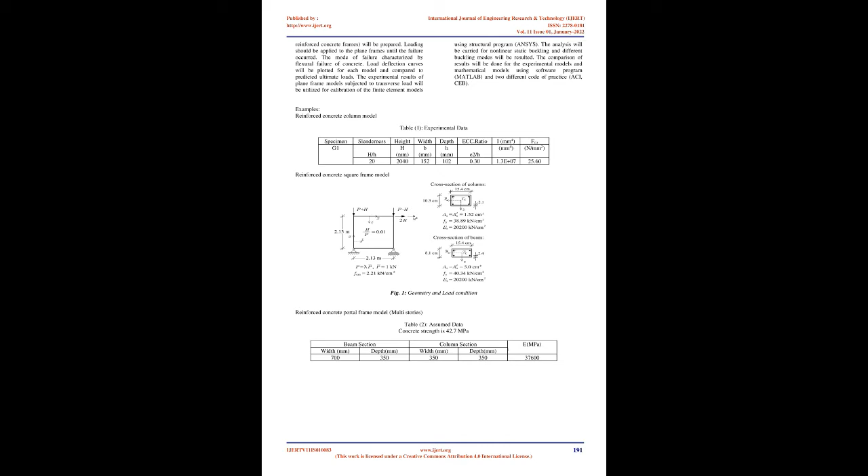The results obtained from the analysis above were compared with experimental published results, the American Standard, ACI 318, and the European Standard, CEB, and showed reasonable and acceptable agreement with the computer program and ANSYS software results. Keywords: nonlinear buckling analysis, eigenvalue buckling analysis, reinforced concrete frames, finite element.

1. Introduction. Calculating the stability of structures has always been an important engineering discipline. Especially the calculation of the critical buckling load of a structure has been a subject for study since Leonhard Euler in 1744 calculated the critical buckling load for a simply supported column. Buckling is a phenomenon where a structure suddenly changes from one equilibrium configuration to another equilibrium configuration.

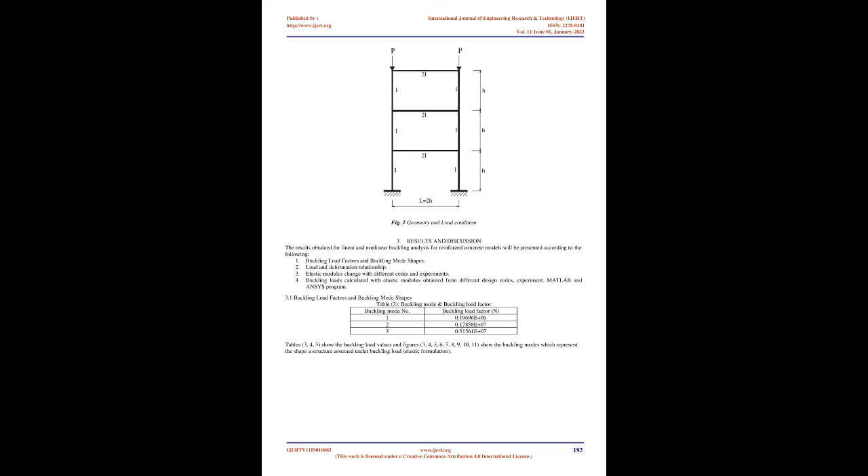The calculation of buckling loads of a structure is of great importance, due to the possibility of sudden failure of the structure if the critical buckling load is reached. Some structures might lose all stability when the buckling load is reached, which could put people at risk if a roof or other similar structure loses all stability. Many researchers have studied finite element method and nonlinear analysis of structures. Some of these studies will be cited here.

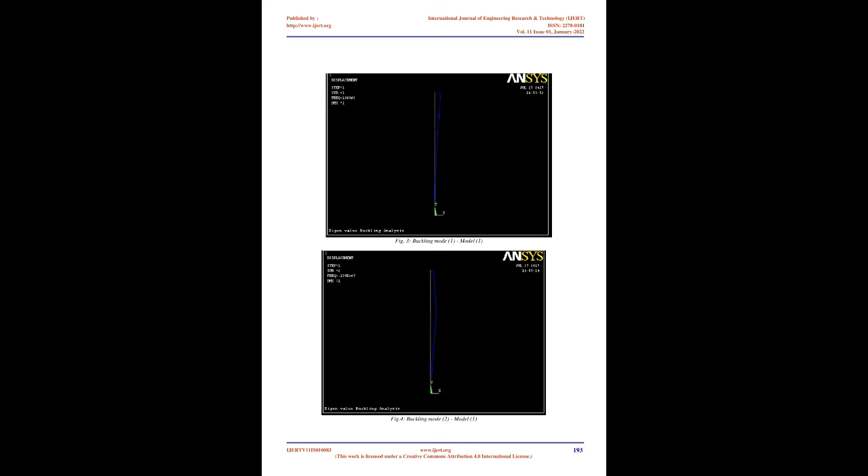Wood and Zienkiewicz, 1977, presented a continuum approach for the geometrically nonlinear analysis of oriented bodies, e.g. beams, frames, and arches, in total Lagrangian coordinate system using finite element method. The nonlinear equilibrium equations are solved using the Newton-Raphson method, for which a number of examples were solved. The derivations were extended to include axisymmetric structures.

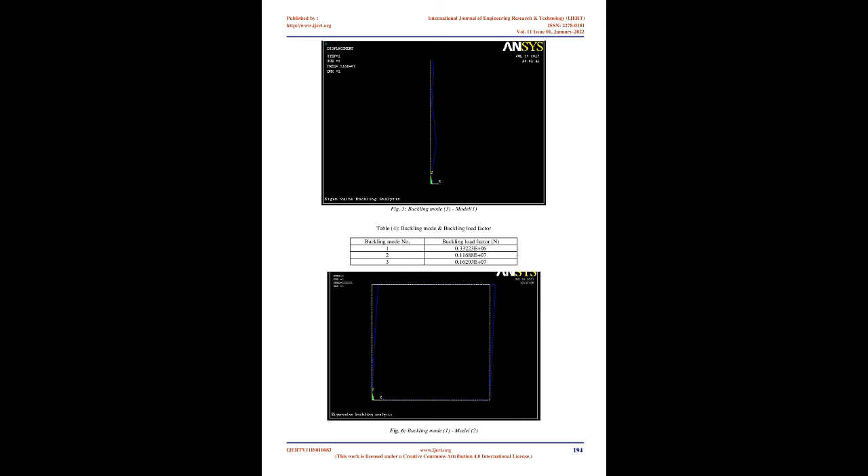Kam, 1988, presented a general method for the large deflection analysis of inelastic plane frames. Chan, 1988, presented a geometric and material nonlinear analysis procedure for framed structures, using a solution algorithm of minimized residual displacements. Kassimali and Abbasnia, 1991, suggested a method for large deformation and stability analysis of elastic space frames.

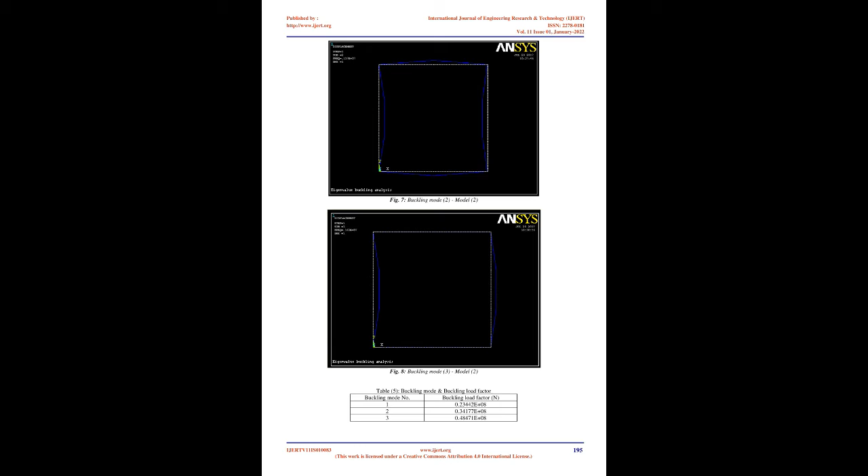K.W. Wong and R.F. Warner, 1997, presented an efficient approach for the nonlinear analysis of reinforced concrete frames using line elements. Zdenek P. Bazant and Yuyan Xiang, 1997, proposed an improved method of analysis of reinforced concrete columns in braced, no-sway frames, which was suitable as a simple computer solution for design practice and was more realistic than the existing ACI and CEB methods.

Endre Dulácska, 2007, discussed the approximate determination of the elastic plastic load parameter of structures, and he also established a lower and an upper bound for the critical failure load parameter, with the aid of which the results of computer calculations can be checked.

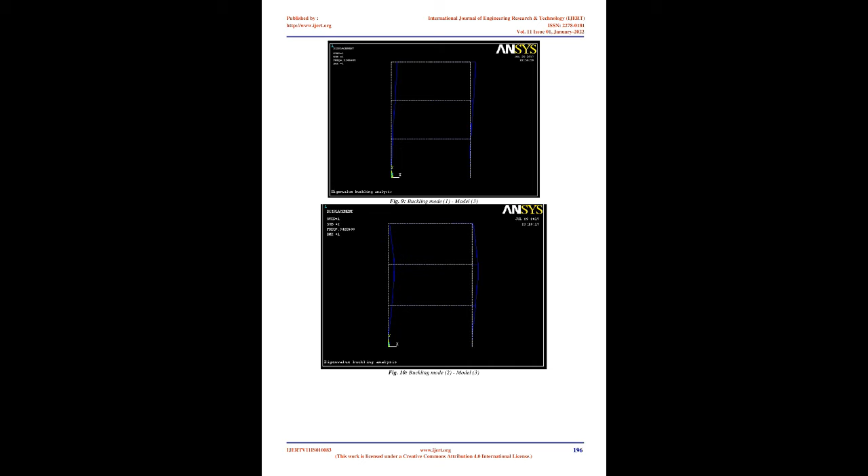Rafat Sezer, 2010, studied the geometrical nonlinear analysis of prismatic plane frames with the stiffness matrix method by using stability functions. K. Tzaros and E. S. Mistakidis, 2011, presented a method for calculating the buckling loads and the buckling shapes of continuous beams with unilateral intermediate constraints based on the theory of elastic stability using the Euler equilibrium method. The purpose of the study was to find the critical load or buckling load of the reinforced concrete frames.

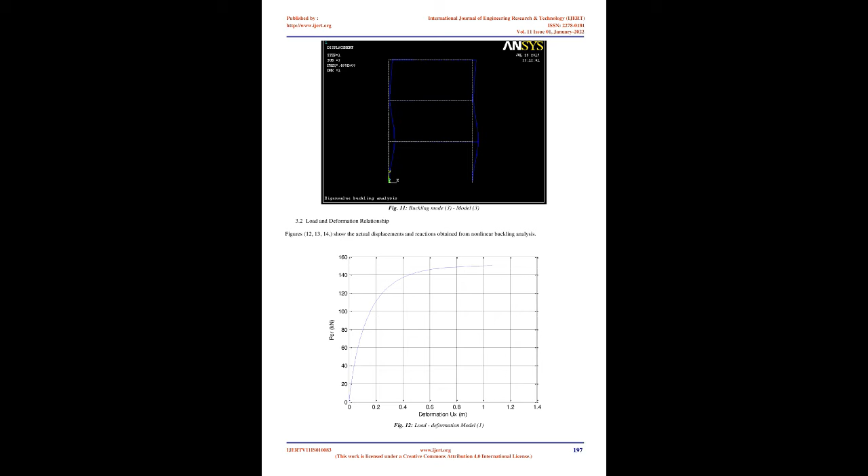2. Methodology. To predict buckling loads and load deformation curves of reinforced concrete frames, the methodology will be prepared through the following steps. Different finite element approaches have been proposed for the analysis of different types of structures. The theoretical study depends on nonlinear static buckling of plane frames. The Newton-Raphson approach will be utilized to trace the equilibrium path during the load deformation response.

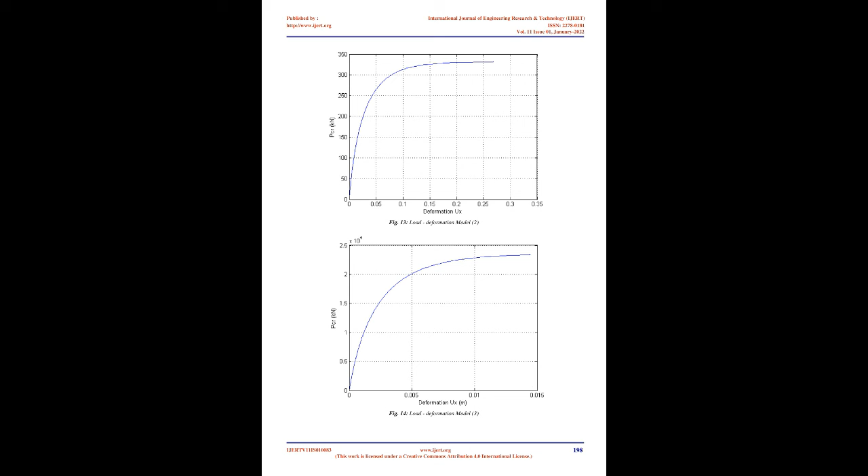About 3 models, 1 single reinforced concrete column and 2 reinforced concrete frames, will be prepared. Loading should be applied to the plane frames until failure occurs. The mode of failure is characterized by flexural failure of concrete. Load deflection curves will be plotted for each model and compared to predicted ultimate loads.

The experimental results of plane frame models subjected to transverse load will be utilized for calibration of the finite element models using the structural program ANSYS. The analysis will be carried out for nonlinear static buckling and different buckling modes will result. The comparison of results will be done for the experimental models and mathematical models using the software program MATLAB and 2 different codes of practice, ACI and CEB.

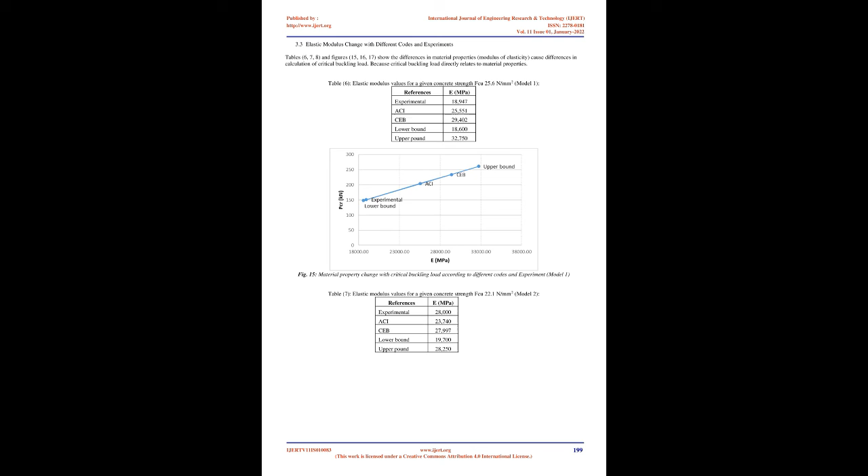3. Results and discussion. The results obtained for linear and nonlinear buckling analysis for reinforced concrete models will be presented according to the following. 1. Buckling load factors and buckling mode shapes. 2. Load and deformation relationship. 3. Elastic modulus change with different codes and experiments. 4. Buckling loads calculated with elastic modulus obtained from different design codes, experiment, MATLAB, and ANSYS program.

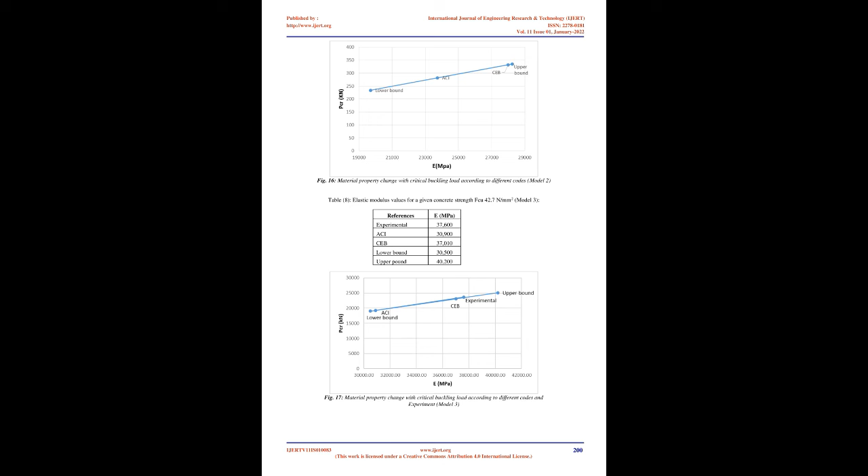3.2 Load and deformation relationship. 3.3 Elastic modulus change with different codes and experiments. 3.4 Buckling loads calculated with elastic modulus obtained from different design codes, experiment, MATLAB, and ANSYS program. 3.1 Buckling load factors and buckling mode shapes. Table 3, buckling mode and buckling load factor. Buckling mode No. Buckling load factor, N.

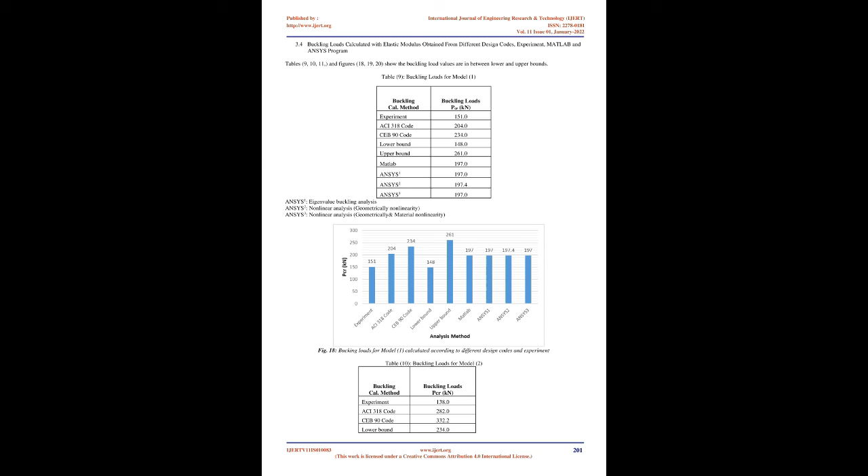4. Conclusion. The discussion of the results of the analysis obtained in this study resulted in the following conclusions. 1. The eigenvalue buckling loads and the buckling modes for various reinforced concrete frames were presented using the ANSYS computer program. 2. A nonlinear buckling analysis program using MATLAB was used to compute the buckling load, utilizing the stability functions to determine the buckling load. Comparison with ANSYS program results showed little differences in their values.